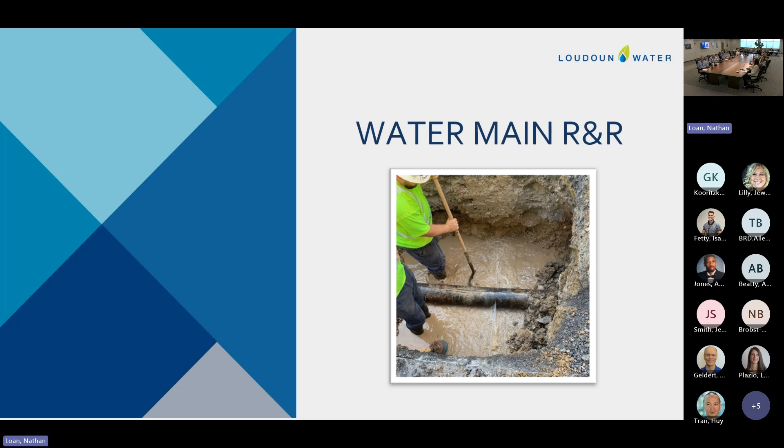So I broke up this presentation into two separate things, basically one for water and one for sewer. So we'll start with the water side. So this is just a picture of a break that we had, pretty typical. So overall, our system, we have over 1,400 miles of water main. The average pipe age is about 20 years old.

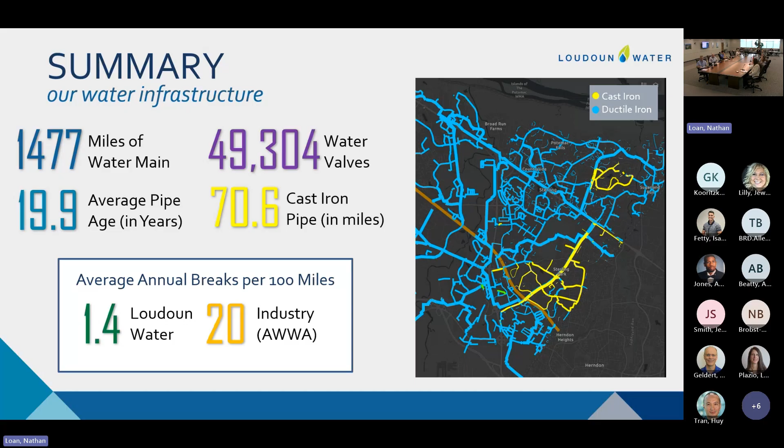And the key number on this slide is that we have 70 miles of cast iron pipe. So that's the yellow showing up in that map on the side. All the blue on that map is our ductile iron. So the majority of the system is ductile, but the older stuff is all cast. Our average annual break rate per 100 miles in the system overall is 1.4 breaks. And the industry average reported by AWWA is 20. So we're really doing rather well compared to our peers.

So I wanted to start this presentation by talking about what we've done in the past. So we've done 3 separate water main replacement projects, 2 of which I presented to you probably 5 years ago. The 3 projects were all cast iron replacements. One of them we replaced with plastic. We tried it out. We didn't like it. So the other 2 we replaced back with ductile. That was just about 2 miles of replacement that we did. And this picture shows the trench. So these 2 projects we dug down, took out the existing pipe and put the new one right back in the same trench.

We've also done 3 separate valve replacement projects through contractors. We've done a bunch of valve repairs and replacements in-house in spots that we can do, but when the valves are in the middle of a really busy right of way or they're too large, we have a contractor do them. So the valve replacements are important because when we do have a water main break, if the valves aren't working, then more people are out of service. So the more we can have the valves working, the better it is for everybody.

So there is one more valve replacement project in the CIP right now, and I think that'll be presented to you at the end of the year. As far as water main replacements, we have 2 or 3 in the CIP right now. We'll be adding another one this year. Kathleen, for a valve replacement project, how many valves would we do on something like that? Do you have a ballpark? 10 to 12 valves usually. Okay. The one coming up at the end of this year is more, because we're just gonna knock out all of the valves that need to be replaced. I think it's like 20. Okay. Yeah.

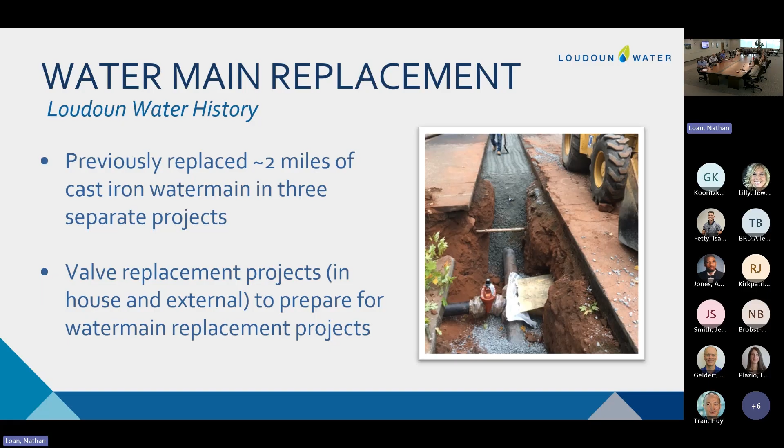So here's some statistics. So the average age of our cast iron pipe is 52 years old. And it just so happens that the Utah Water Research Lab does a report every 5 years, I think. And the last time they did this report, they put out a statement that said the average age of failing water mains is 53. So we're right in there. You can see from the graph, it shows how old the pipe is and how many miles of that age of pipe we have. So about 70% of the cast iron pipes that we have are older than that 52-year average. So we're ripe for needing to be replaced. We're right at the failure rate.

Do we share our information with them? So like all our cast iron pipe, our failure rates, do we have our own average for when our cast iron fails? I'm not sure that we share with Utah. We have shared with AWWA in the past, but it's not something that we do every year. Okay.

And then, ductile iron, I think we say it's 100-year life expectancy, something like that? Yes. What was our life expectancy, what we thought it was? Yeah, what did we think it was gonna be when we were putting this stuff in some years ago? Does anybody know? I'm not sure that they thought about that at the time, but usually cast iron will last 75 years. Okay. The research that I did a few years ago showed that this kind of age of cast iron is failing prematurely for some reason. Hmm.

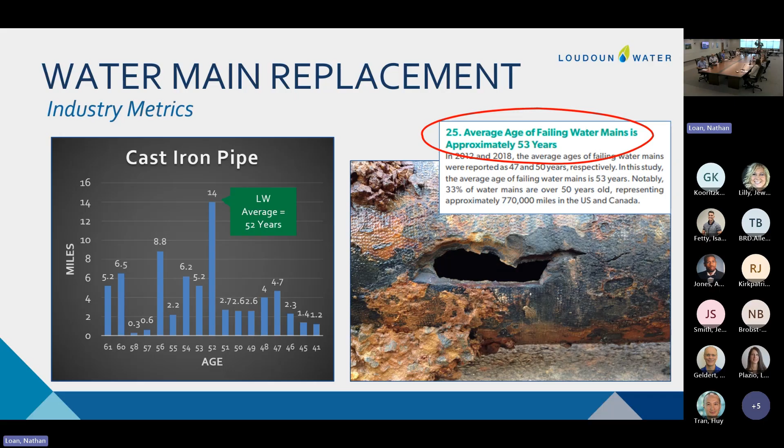All right, so there's just some more stats. Basically everything that's breaking is mainly 6-inch diameter cast iron mains. So it's that specific portion of the system that's breaking. And you can see the miles of pipe that we have, that green. So half of all of the cast iron we own is 6-inch. So that's why it's starting to become a problem. That part is failing.

So in 2017, we did a study with O'Brien and Gere to determine if corrosion was really what was causing these breaks, because at the time this Utah study hadn't come out. We didn't know everybody else was experiencing the same thing. So we had them look at Sterling Park, which is the oldest area where we have most of the breaks. And they did a soil survey on a bunch of different areas to determine where the most corrosive soil was. And then we picked 10 spots to dig down to the pipe and see how it looks.

And so this is one of the pipes that they dug up, and you can see it looks pretty good. That's an 8-inch cast iron pipe, and it was installed in 1967. So they determined that corrosion was really not the issue for why we were having so many breaks. It's really based on the material and the minimal or lack of bedding around the pipe. Most of the breaks that we dig up, there's no bedding at all. So it really has to do with the installation method.

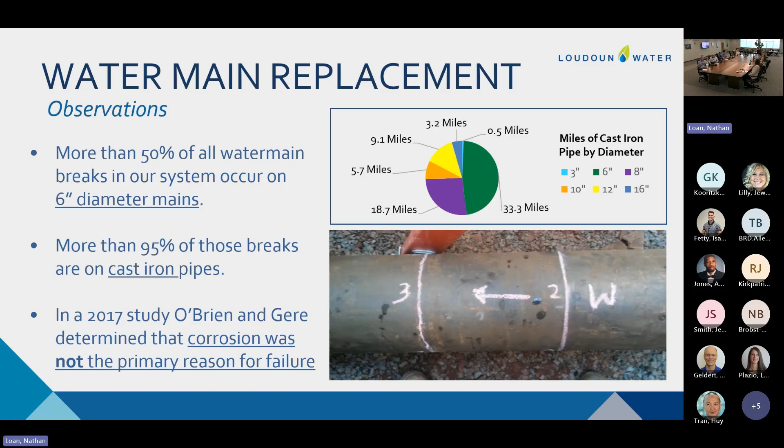So, to deal with this failure rate problem, we did a kind of brute force risk matrix prioritization to determine where we should be doing these projects. And that's how we ended up with the 2 projects in Sugarland Run that we replaced 5 years ago.

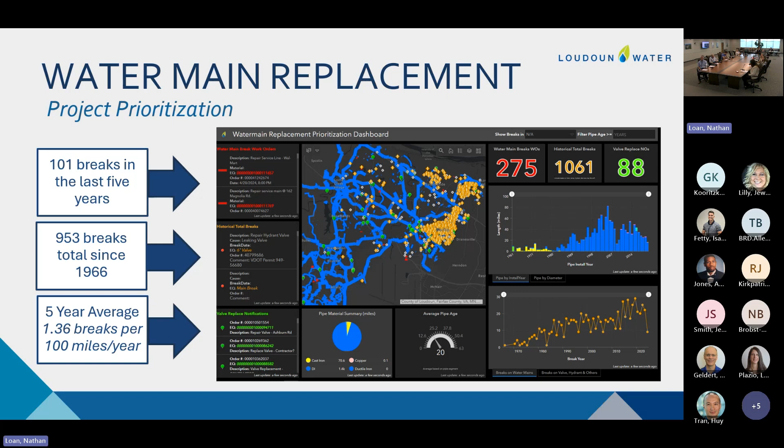All right. So based on that, knowing we have 70 miles of cast iron pipe in the system, and that majority of that doesn't have very good bedding, that it's failing, it's reaching the age where it needs to be replaced, went through and kind of sorted out where the cast iron is and looked at how it was installed. And so went through those subdivisions and broke them up into projects about 5 miles each.

So if we can replace 5 miles a year, we'll have replaced all of the cast iron in about 14 years. And it was installed over 20, and we already know that some of it is beyond the end of its useful life. So we'll just basically keep up with that end of useful life estimate. I think Amelia presented the first 5 mile project for design month before last.

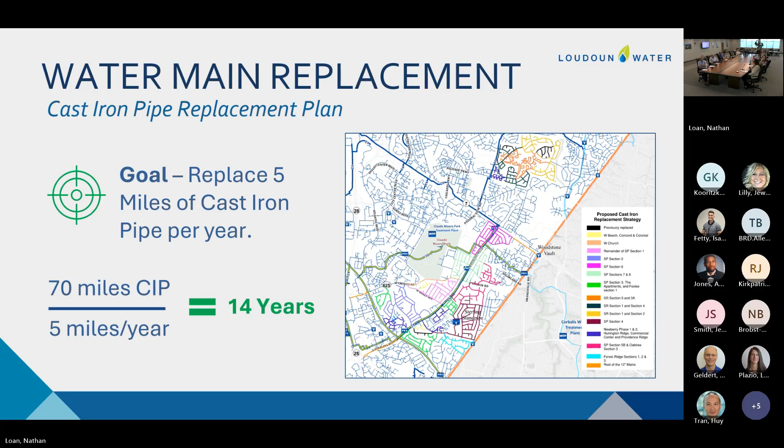With the dashboard that we have, do we have a sense for how deep this pipe is? Is it relatively shallow? We're not having to dig way down? Majority of it is about 3 feet deep. Oh, that's great. Okay, that's nice. Is that the normal, in today's standards? Yeah. Between 3 and 4 feet is usually where we put it.

We didn't get an extended warranty on this thing. No.

But the rest of the system, we may have a problem with corrosion in the future. And so we're already having a problem on this one street, Oakdale Court. It's in Countryside. And I think we've had 4 breaks in the last 8 years. And it's a problem because when they go to fix the break, the pipe is so pitted and corroded. When they put the bands on to put the new piece of pipe in, they can't find a spot where they can get a full seal.

So it's very corroded. And the problem with this particular site in Countryside, it's much lower than Sterling Park. So in Sterling Park, the pressure is not very high. So when we have a water main break, it's not that much water coming out. On Oakdale Court, when there's a break, the pressure there is usually around 115 PSI. So we could have 500,000 gallons escaping in one break. So we really need to be very direct in where we're replacing pipe.

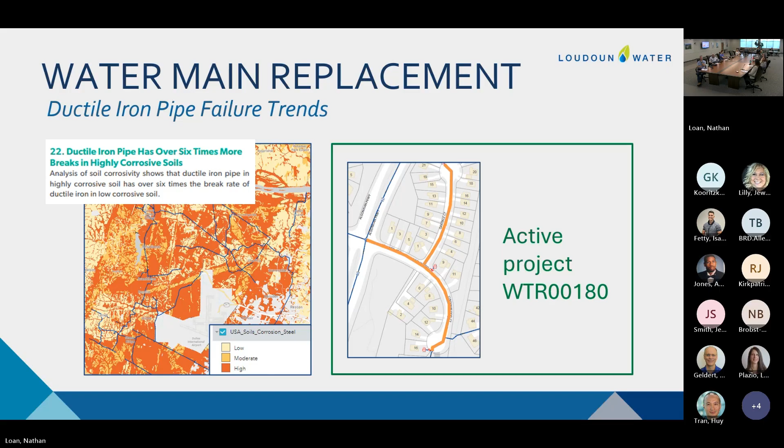So some of the things that we're doing: I was talking about leak detection. So that's the nodes that we put on the hydrants that listen all the time, and then the 400 miles a year that we walk around and listen to. We're looking at our air relief vacuum combo valves and making sure that they're clean and actually working. So that's helping us extend the lifespan of that pipe. The cathodic protection we talked about. And then we're also doing valve exercising. So I talked about how the valves were important.

The valve exercising basically checks how many turns it takes to open or close a valve and the torque necessary to do so. So you can make sure that what's in our system is correct for the size and that it's actually holding all the way and not leaking. And then we also have our yearly hydrant flushing program, which isn't on the slide, but we go through the system and flush every hydrant once a year to make sure that it's working and to clean out the system. So all of these things are helping us take care of and maintain the linear water system.

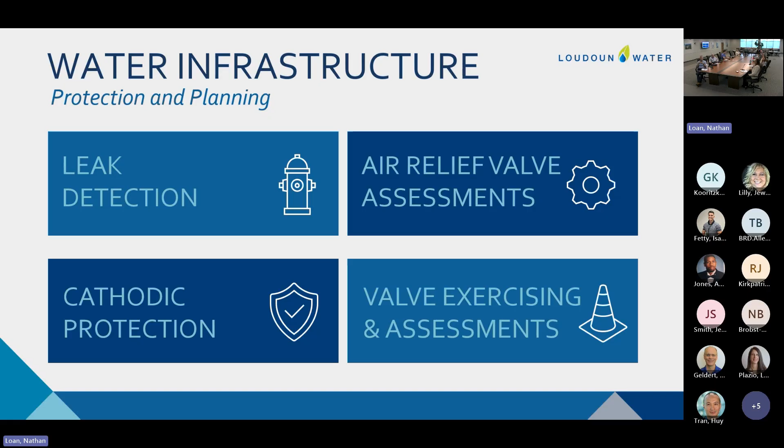So next steps for the water side: we are going to expand the acoustic listening system. We just installed another 77 acoustic listening nodes this week. And like I was saying, we just updated our corrosion standards. So we're creating a training program so that our land development and capital engineers have a better understanding of what we're trying to install and why. And hopefully that'll help us in the future with all of this ductile iron. That's it for water.

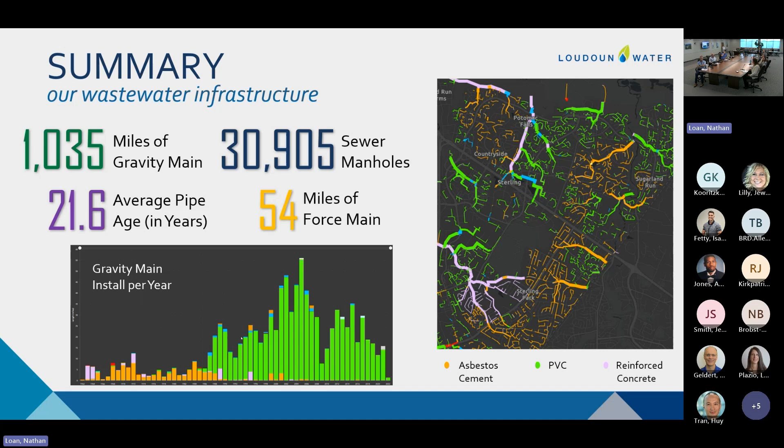So with the history of the rehab on the gravity system, we have again done 3 distinct sewer lining projects. 2 were done in Cabin Branch 10 years ago, and 1 was done last summer in a bunch of different sheds to hit our worst pipes. In total, we've lined about 12 miles of sewer main. That's mainly because of the Cabin Branch projects that we did. And Cabin Branch is in Sterling Park, so it's both the water and the sewer that we need to maintain out there.

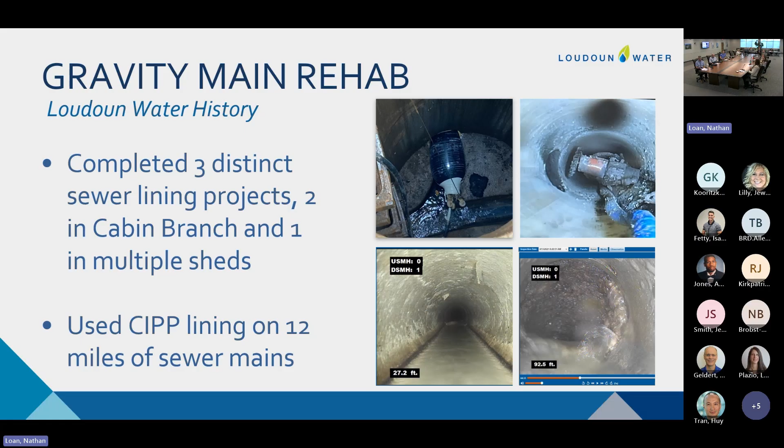All right, so the goals for the sewer rehab project are to prevent sanitary sewer overflows. So we've done a pretty good job of not having sanitary sewer overflows in our system, but obviously we want to keep that from happening in the future. We want to reduce I&I, which is water coming into the pipe, not water coming out of the pipe. And that helps us because then we don't have to treat it downstream, either at Blue Plains or at Broad Run. And then maintain level of service for our customers so we don't have to tell them that they can't use water. So those are the main goals for this program.

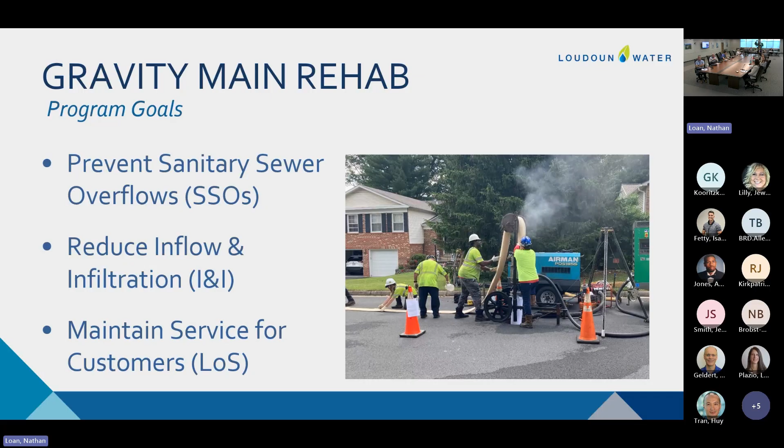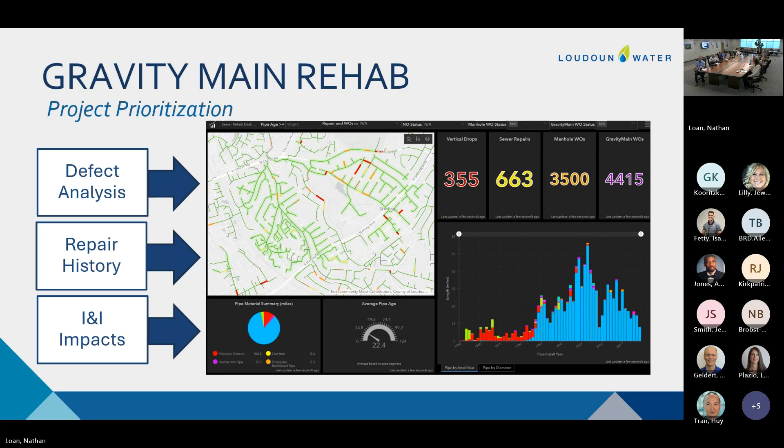So our rehab strategy right now is we started 2 years ago, I think, a flush then TV program. So what they do is they go through and they clean the sewer, and then they wait about a month, and then they TV it. And that's so that the sewer doesn't have as many spider webs or stuff to get stuck on the glass. You can see the pipe a lot better. But we wait a month because we were finding when they go through and clean it, they cut all the roots out. So we were waiting a little bit of time to let the roots grow back so we can see them easier if they're there.

That's smart. Yep. So as we go through and look at these different sewer sheds, we're starting to program in the projects that we need, that we find when we do the work. But there are some problems that we can't fix with lining. So some of those problems include if there's a belly in the pipe. So if the pipe doesn't have a flat slope, if it's got a weird divot in it. We can't fix that with lining. We have to remove it, replace it, either the portion of that segment or the whole thing.

Or if there's a gusher, like this picture in the center, that's a gusher. So they wouldn't be able to line that. They'd have to grout it first if they could. And if not, we just have to remove it and replace it. So there is a project right now going on. It'll go to construction probably beginning of next year. That is replacing some pipe that one has a belly, one is this deformed pipe where something's sticking out into it.

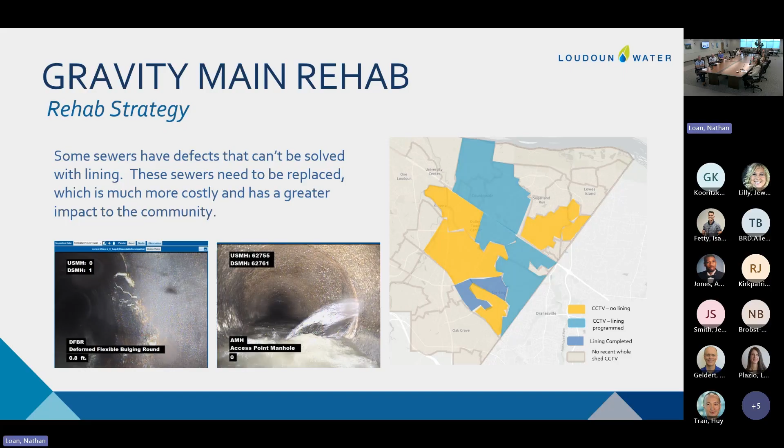So we've also done some other interesting rehabs. This one was just an interesting project we thought you'd like to hear about. So we did a large diameter sewer inspection and we found that this pipe, I think it's 42-inch, this gasket was supposed to be up here in this joint and it was falling off and every single gasket was falling out. And so then it was falling in the pipe and causing backups. So we hired this company to come in and physically go into that sewer and cut away all the gaskets and rip it out.

So this guy went in full scuba gear and went down into the sewer and just scooted along the bottom and pulled out all this stuff. It's pretty wild. Very interesting. Did he have a hose coming for his air? It doesn't look like he's got much of a tank on. Yeah, he's got a hose for air, lights. It wouldn't fit with the tank. No, that's right. Those cave divers get in some really tight spaces and they've got air on, but it looks like he's got a hose. It was pretty cool. That's pretty wild.

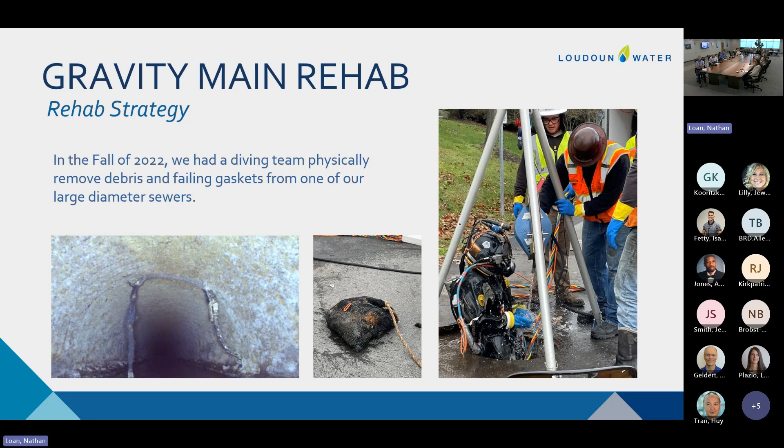So other things we're doing for gravity sewer: obviously CCTV, we're looking at I&I wherever we can and stopping it, the flushing program that we've got going. And then also I'm doing some sewer flow monitoring to try and pinpoint where we should be looking a little bit harder, seeing where the I&I is coming from. And then we're going to embark on the lateral lining and grouting program that I was talking about. So lots of things for sewer as well.

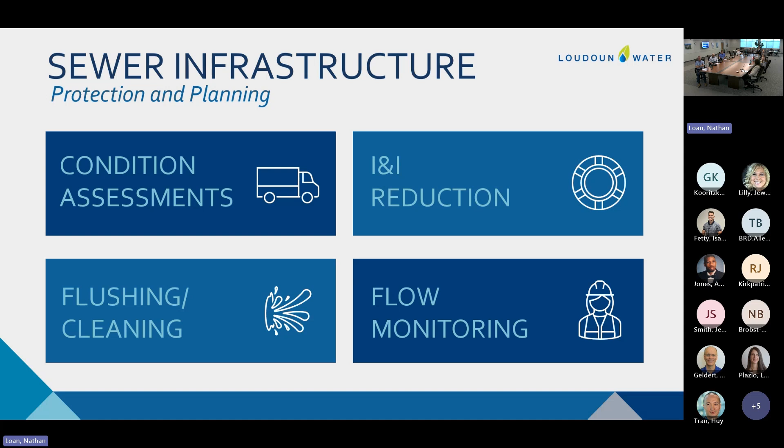Are water mains and sewer lines anywhere near each other? Reason I'm asking, in parts of India they're right next to each other and they're leaking into each other. The sewer is leaking into the water, so you don't drink the water in parts of India. No, the standard by VDH is 10 feet separation. So they're close, but they're not that close.

So next steps for our sewer, we're looking at this manhole inspection technology. I didn't talk at all about manholes. Right now, we're just lifting lids and looking in, seeing what we can see. In the future, we hope to get some kind of camera so we can have a video like we do for the sewer to check out our manholes. And then we're going to be working on our force main condition assessment. So that's the pipe coming from pump stations to gravity sewer, looking at what's the condition of that and do we need to be doing any maintenance on those as well.

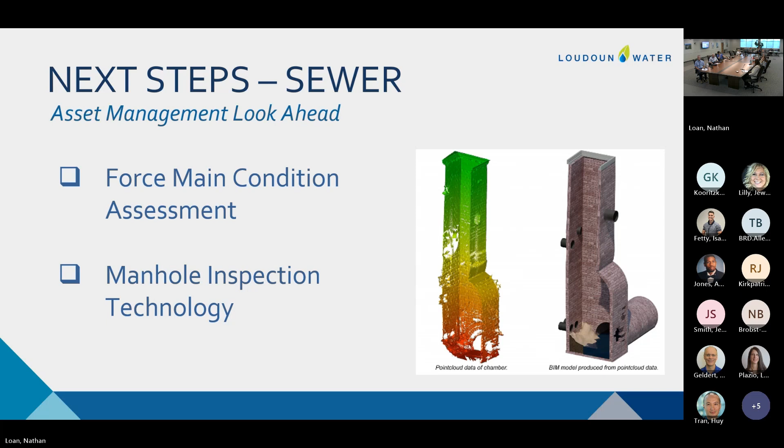So key takeaways, we're moving ahead with all these programs. We're getting a lot of data, but we may have to change things in the future. We'll see how it goes. Our water main replacement schedule is pretty critical for the cast iron so that we can reduce the number of breaks that we're seeing. And any planned work that we can do is vastly less expensive than any emergency repair that we get into. And the other thing I wanted to say is that everyone at Loudoun Water needs to be thinking about asset management, and they're doing a great job. Inspections, maintenance, engineering, everybody is really thinking about this and putting it all together. That was it.

Thank you. Great presentation. Excellent. And I agree, getting out in front of this stuff is huge, even if we don't want to deal with some of these things, but being proactive is huge. So I think that'll save us a ton of money. It'd be interesting to do a sensitivity. We've got our 100-year plan that's fuzzy, but what if all that infrastructure's lasting 50 years instead of 100 because it's all corroding? None of us know. There's no way to know, but that all of a sudden has a big impact on things.

Thank you, Kathleen. That was great. Are you still on? Still there? I'm here. Any questions, Terry? No, let me just echo Brett's comments once again. It's good that we're ahead of this and we're thinking about it, because time goes by a lot faster than you think. So good job. Good presentation, but I think take some of this and cut it down a little bit to let the board know about this. I think it's a good piece of information for them to know. All of it's very good. It might just be too long for a full board meeting, but some of it would be very helpful for them to know that we're being proactive, we're ahead of it, and what's failing and not failing and why, and corrosive soils. It's good to know. Yeah.